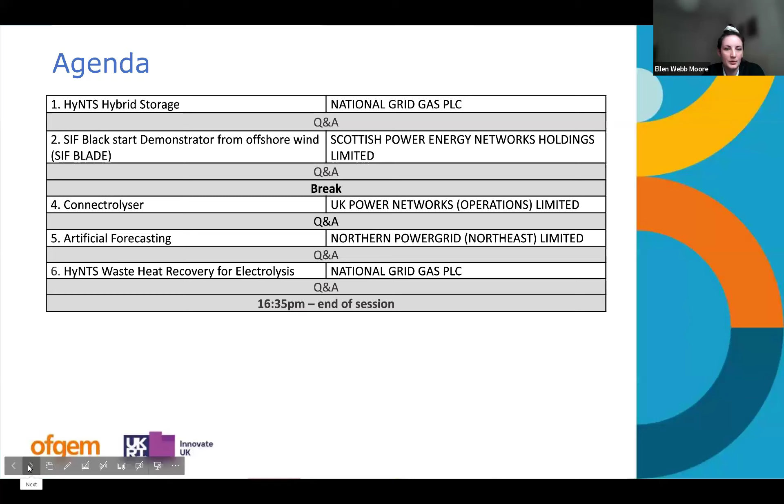So without further ado, we are ready to go with HyNTS hybrid storage.

Hi, good morning everyone, I'm Ellie. Sorry, can everyone hear me all right? Sorry, I haven't used Zoom very often. Yes, I can hear you. Perfect, yeah, just wanted to recheck before I start speaking.

Good afternoon everyone, I'm Ellie, an innovation specialist from the innovation team. Today I'll present on the SIF hybrid storage project alongside the project partner who's been working very closely within the project as well. In short, this project will investigate the use of a hybrid storage system to provide safe and efficient storage of hydrogen for our gas turbine operation.

Just to paint a picture, across the national gas transmission system there are many different types of asset and equipment present at the moment, which play a great role in the safe and reliable operation of our gas transmission network. The national transmission system currently uses compressors to manage the pressure and flow within our pipeline to make sure gas demand can be met. The majority of compressors on the NTS are driven by gas turbines, fueled by our existing natural gas within the NTS or pipeline.

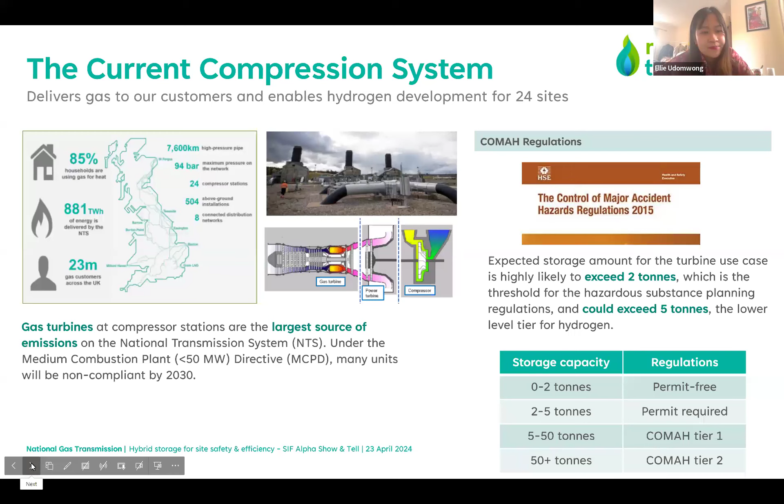Just to build a bit more of the picture on why we need to use hydrogen and why storage is the vital element: most of the gas turbines in our network can be repurposed to hydrogen. There is a project, part of SIF Beta Round 2, currently conducting the demonstration of our existing gas compressor, proving that our compression system can be repurposed for hydrogen - this is the future grid compression project.

Also the gas turbines are not running constantly. It depends on the fluctuation of the demand for gas and other elements within the operation. As a result, we need hydrogen storage facilities in order to provide flexibility and make sure that our supply of hydrogen is able to tackle the instant demand for gas.

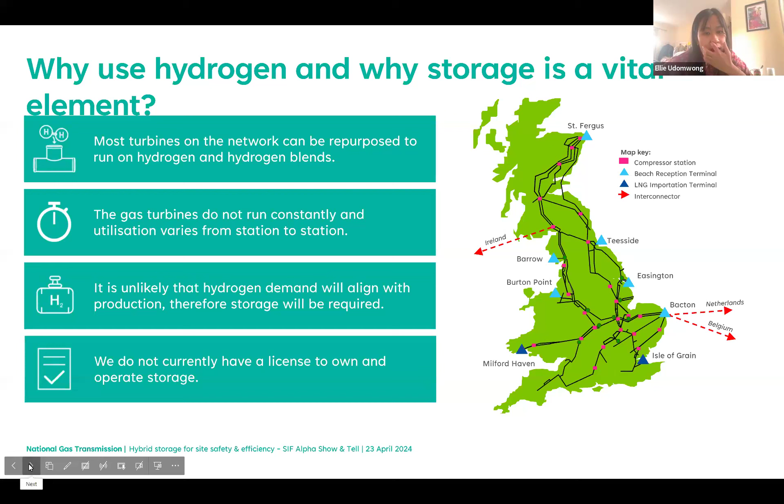Next slide, please. So storage and release of hydrogen within the relevant timescale is going to be vital in order to ensure there is a consistent energy source and improve resilience of the network. That is why we are having a look at the study of this system.

For example, compressed gas storage is already a method being utilized widely today within green hydrogen production. However, for our operation, the site requirement and safety of the system is going to be limited, and we need to look for alternative technologies such as solid-state hydrogen storage to provide the benefit of solid storage density and also safety.

But within the discovery phase of the project, we proved that solid-state storage couldn't supply hydrogen for our operation alone, due to quite a low release rate of the system - it can't tackle the requirement and the demand.

As a result, this project would like to look at whether hybridizing the solid-state hydrogen storage system alongside a gaseous hydrogen storage system could provide safe and efficient storage of hydrogen for gas turbines.

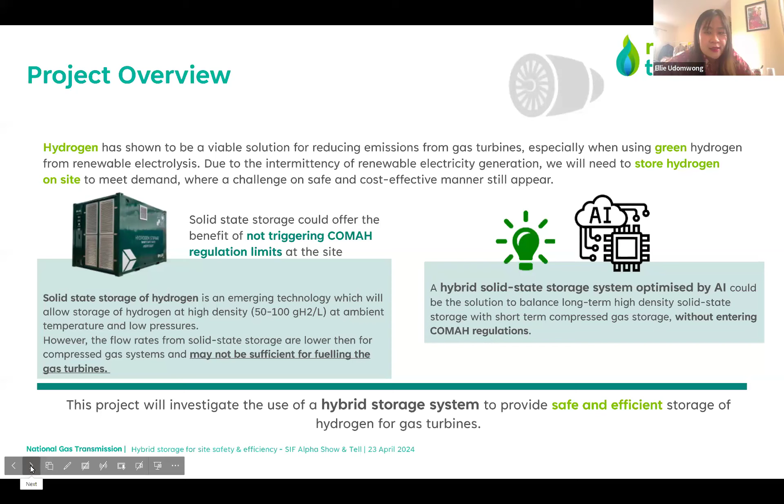Just a bit of a quick explanation on solid-state storage: because hydrogen reacts directly with the storage material itself, the solid-state hydrogen storage technology actually offers the benefit of potentially avoiding the COMAH regulation, just because technically the component being stored at the location is not hydrogen.

Just to introduce the project plan that we have conducted in the alpha phase and also the project partners: we have been working alongside MTC, H2GO Power, as well as HydroGenus and UKPN.

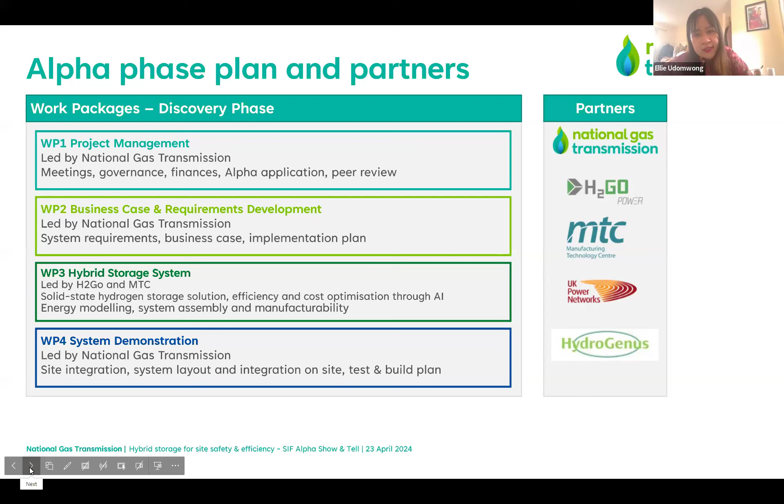I've been working very closely looking at the energy modeling of this system, the techno-economic analysis by utilizing AI of the system, as well as conducting the system demonstration design and defining what direction is going to look like after the alpha phase of the study. Next slide, please.

Within the alpha phase of the study, we have had a look at one of the compressor station locations, and we understand that the peak fuel consumption of the site is going to be 45 megawatt capacity. More importantly, we also found that there is a selection of system configurations in order to use hybrid storage within our operation.

We also have proof that different storage materials from H2GO Power technology could actually support different deployments of the hybrid storage system and also meet the requirement of the gas turbine. More importantly, the energy model has shown that if we blend 25% hydrogen into our gas turbine, we are less likely to need any additional hydrogen supply from either through-the-fence or an alternative hydrogen producer.

However, if we actually blend 100% hydrogen into the gas turbine, it's more likely that we will need additional capacity or additional hydrogen supply from somewhere else. More importantly, within the location we studied, we have highlighted that the associated equipment of the system is going to fit within the space available at the location. We are also looking at the hazardous area zone, and the findings have shown that the system can be kept away from the site boundary and wouldn't majorly affect the hazard within the location.

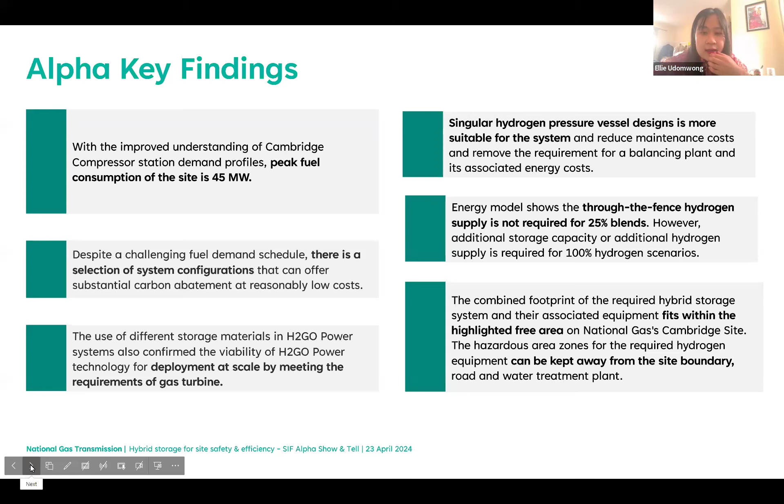Hello all. Working on the alpha project, the alpha phase, the MTC had deliverables that spanned a range of project work packages. The first of these being benchmarking review.

For this deliverable, we researched global hydrogen projects that had hydrogen production and storage elements to them. We made comparisons based on a set of criteria, such as the technology readiness level, commercial readiness level, levelized cost

of hydrogen, time to market release, and hydrogen output. We concluded that the proposed SIF hybrid storage solution was comparable, but with the incorporation of newer technology, such as the solid state storage and the solid oxide electrolyser.

Following the benchmarking review, we moved on to the additional storage solutions deliverable, where we compared a variety of storage options that could sit alongside the solid state storage as part of the hybrid storage system.

We compared a variety of solutions such as compressed gas, liquid hydrogen, and a variety of other material-based storage solutions. We liaised with various suppliers and determined a list of categories for comparison and benchmarked the solutions against one another.

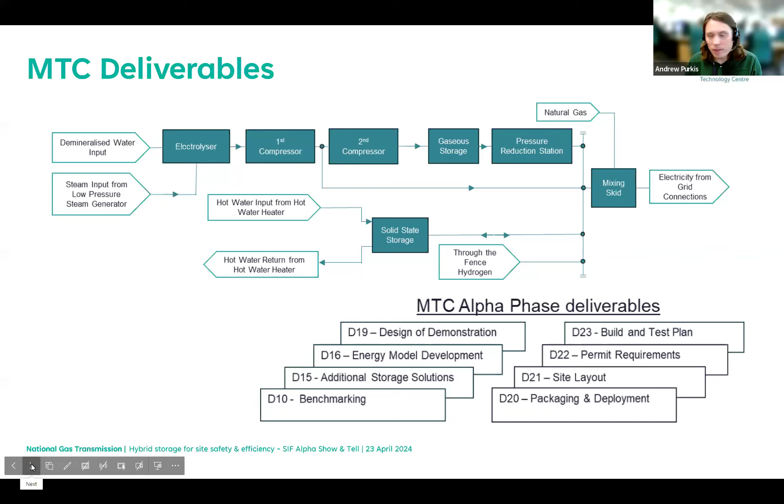An output of the system design deliverable was a high-level piping and instrumentation diagram that incorporates the main system elements. This P&ID diagram does not represent a final detailed design, but is to be used to inform the process engineer at beta phase of the concepts developed during alpha phase.

The top row shows the electrolyser producing hydrogen, then compression to ensure the hydrogen is at the required pressure for supply to the turbine fueling system.

Then a second stage of compression and a gaseous storage element to the system that complements the solid state storage to achieve the required flow rate.

Followed by a pressure reduction station to bring this pressure of the outputted hydrogen from the gaseous storage back down to that required by the turbine fueling system.

and natural gas blend. The hydrogen produced by the electrolyser can flow in and out of the gaseous storage and the solid state storage, and can also flow directly to the mixing skid.

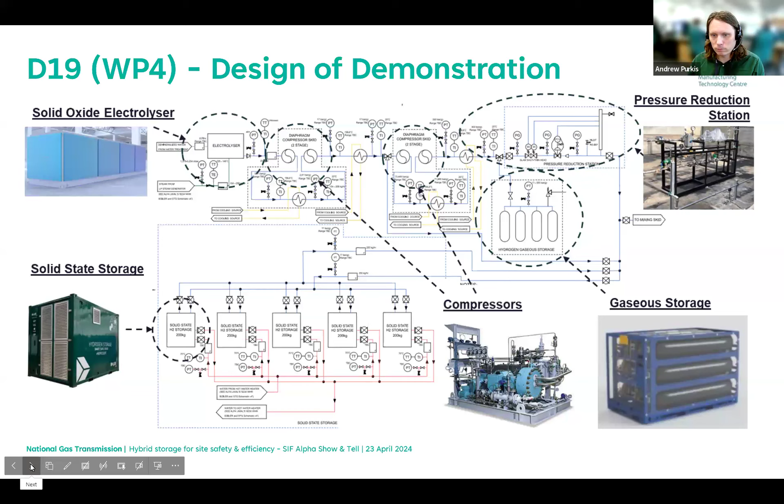Great, thanks very much, Ellie. Yes, next slide, please. Yes, so H2Go, so we basically cover 2 sort of development streams as part of this proposed SIF proposal.

So we do solid state storage, which kind of Ellie's described, as well as AI optimization of the sort of entire value chain, hydrogen value chain. And in this case, we've applied it specifically to the turbine and gas compressor use case.

In terms of the solid state storage, yes, like Ellie said, it's we store it in materials. We pack this inside a shipping container, then you have this plug and play shipping container. So it's gaseous hydrogen in, store it for a period of time, heat it up, and then the hydrogen comes out. It's low pressure, it's the same density of cryogenic liquid, but all at room storage at room temperature.

The hydrogen optimization platform that we use, it's using data from the site, which we then can do better informed decision making. It means that we can optimize the size of different assets at the site for the use case, but also in terms of real-time control in terms of when to turn things on and off.

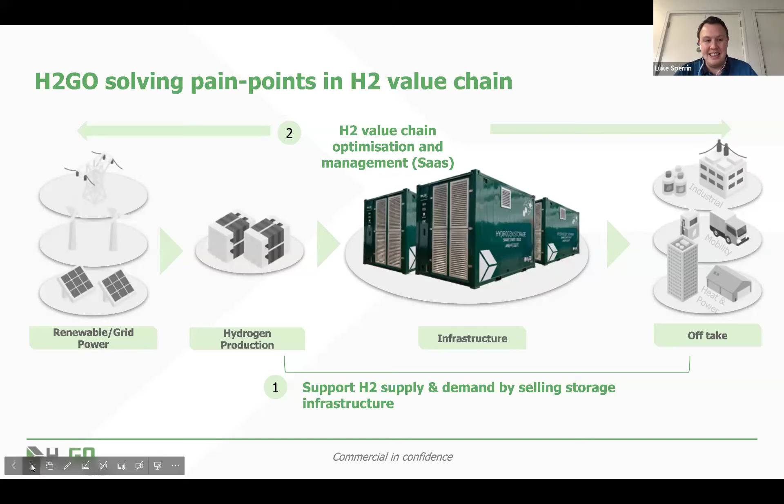As Luke just alluded to, what we're doing on the optimization side is building on the great work the team at MTC did to look at how we optimize the infrastructure sizing of the system when we scale this up to multiple sites in the NTS, in the beta stage and beyond.

The objectives we're looking to optimize are to maximize the total amount of carbon abatement while also minimizing the levelized cost of hydrogen. You can think of these two as a trade-off: given that we have to decarbonize, how can we do this as cost effectively as possible so that minimal costs are passed on to the end consumer? There's a variety of key infrastructure sizing decisions we have to make.

One key thing is the balance between compressed gas storage, which is limited in capacity due to the COMAH regulations, and additional solid state storage. We perform this optimization using an iterative procedure that uses AI to learn from previous simulations and thereby efficiently identify the optimal configuration of the system.

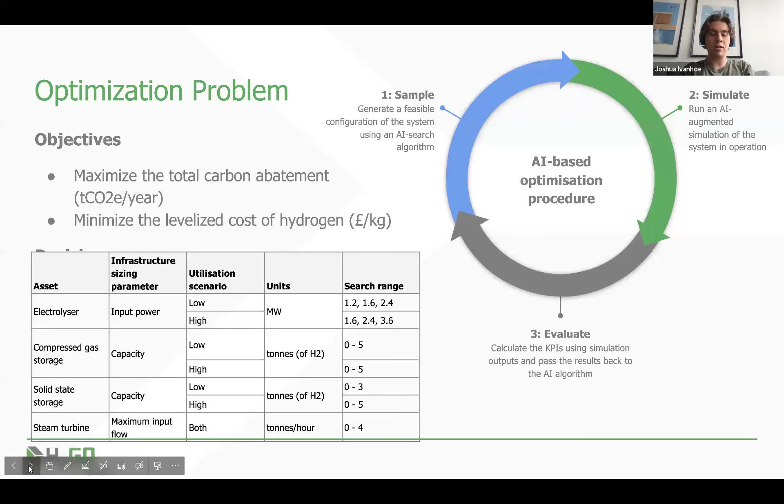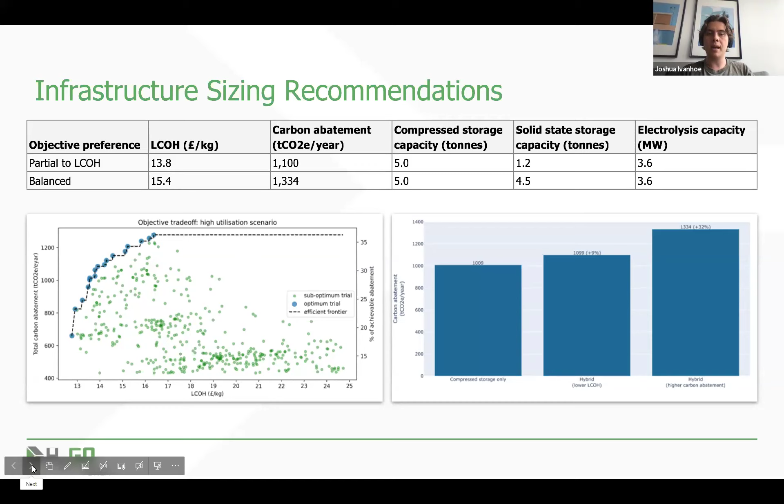The plot on the right shows how in either of these configurations, the solid-state storage enables us to achieve a boost in carbon abatement of somewhere between 9 and 32%, depending on our preference for cost effectiveness.

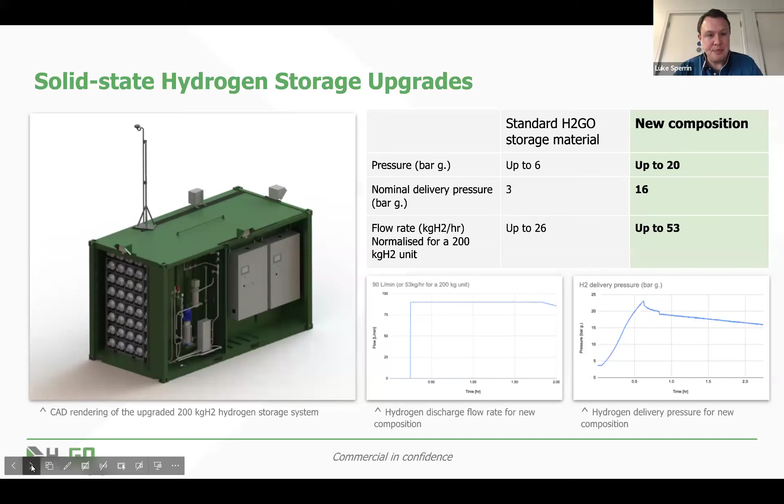So this is just summarizing some of the outputs. We managed to double the flow rate, increase the output pressure by 5x, which meant that it was viable in this use case of the hydrogen turbine use case.

I think we've successfully shown that we can use solid state storage to mitigate against COMAH regulations, which are costly, but also enhances safety at the site and surrounding the site. So you're already storing hydrogen until you need it, for instance.

The use of AI managed to find a more optimal configuration, which meant better use of proceeds and funds to build these sites. But it's also designed for live operation, so as part of the next beta stage, we would be looking at the control of the system as well.

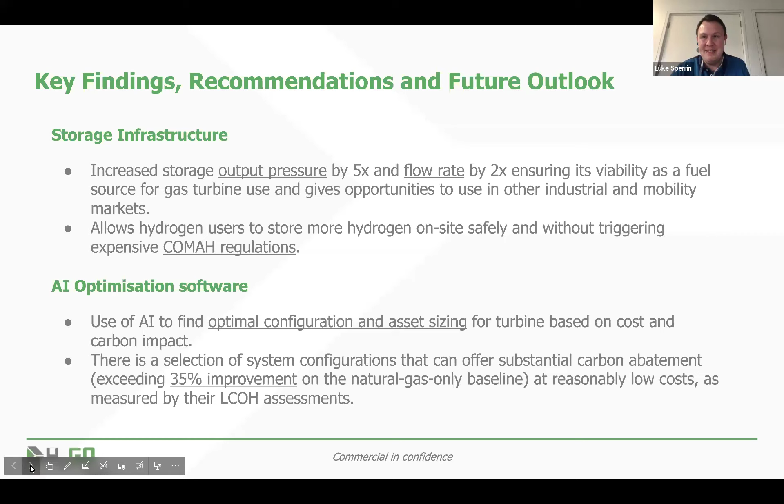So the next element is on the benefit of the hybrid storage system. From the financial perspective, by using this system, the operating of the network could be optimized and also reduce utilizing locally produced renewable energy source, because we are going to be producing green hydrogen on site.

Additionally, there could be a financial incentive to reduce our emissions within operation of the network, which we are planning to implement in the 2030s onward. Regarding the cost saving from our operation, that will obviously reflect in cost savings for the consumers' energy bill, as well as users of the network service.

Regarding carbon saving, that is going to be the direct carbon saving per year against our current business as usual operation, regarding using hydrogen and using hybrid storage to increase flexibility of the system. That is also going to improve the efficiency of the storage mechanism, which will consequently reduce the overall impact on the energy system.

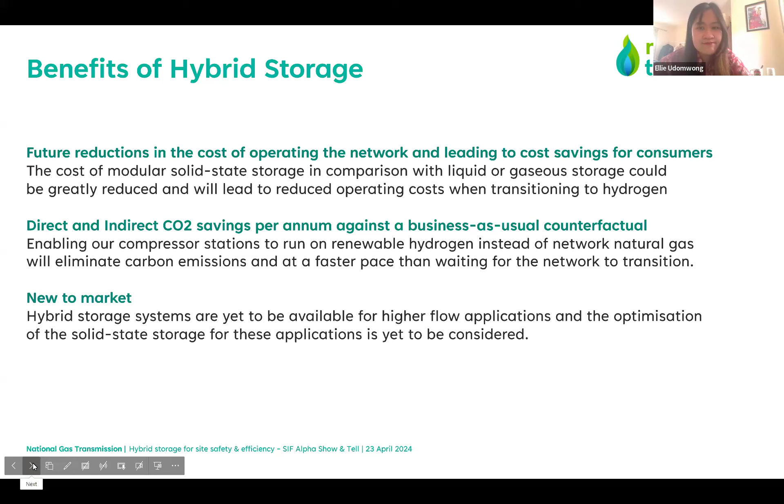So what's going to happen next after the alpha phase of the study? Under the next phase of the study, we are planning to finalize the full system design and cost, and also decide the integration of the system for our selected testing site for the next phase.

We are planning to conduct the demonstration of the hybrid storage system for our NGT operation, and also for the wider application as I mentioned previously. So we are seeing the demonstration of this system not only to bring benefit into our operation.

We would like to explore is there any chance that we could bring together the industrial or transport user, and then also use this testing site to prove the applicability of the hybrid storage system.

And as a result, we would like to engage with either hydrogen users or suppliers and explore what wider collaboration opportunity we can have together.

And obviously after the demonstration process, we are planning to roll out the system. So we would like to see how the system is going to look if we actually roll out this solution across the NTS network or across the asset in the UK. So we will continue to understand our business case and see how it will look if we have a full rollout to the network.

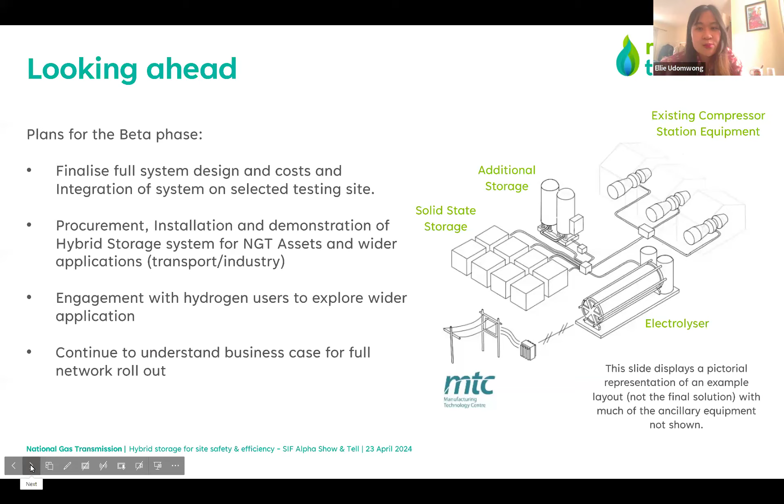I think that is pretty much everything I would like to cover today from the hybrid storage perspective. Thank you so much for listening, and I hope you find it useful. Happy to answer any questions you may have.

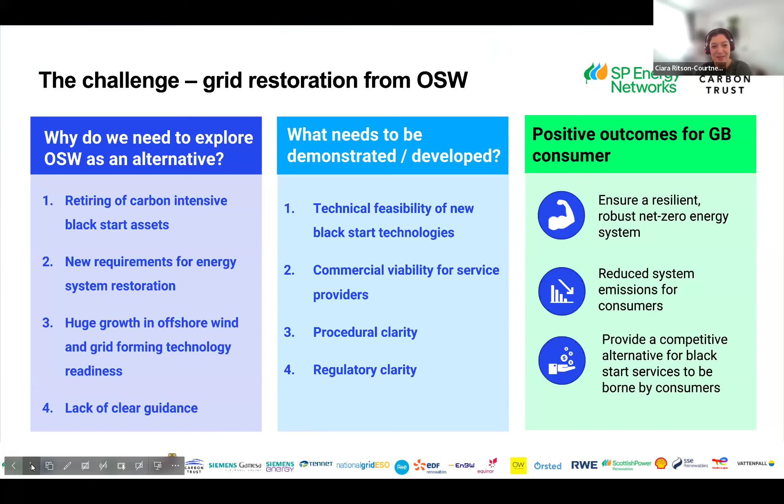Do you mind going to the next slide, please? In SIF BLADE, we have a very large consortium. I introduced a couple of my colleagues there, but as you can see, it's quite broad. The consortium consists of onshore networks, offshore network designers, transmission system operators, offshore wind developers, research institutions, and technology suppliers. The breadth of this consortium has been essential for understanding and defining offshore wind's capability and offering to the GB network. A key part of this project is bringing everyone together to solve the problem as a very large group.

Next slide, please. So what have we looked at in our alpha phase activities? Work package 1 has looked at the technical assessment of onshore system restoration from offshore wind. Work package 2 looked at both the business case assessment and undertook an offshore and OFTO regime review. Work package 3 looked at the technical assessment of onshore system restoration from a coordinated offshore network. Work package 4 has scoped a beta phase, looking at what work still needs to be done to ensure this technology can get to business as usual. And work package 5 has just consisted of general project management.

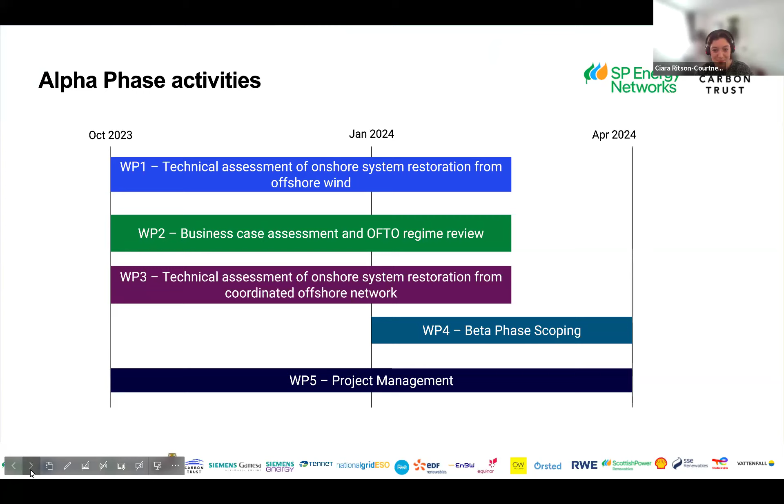So we will talk about some of our work package 1's findings now. If you don't mind moving to the next slide.

Augusti? Good afternoon, everyone. My name is Agusti. What I would like to discuss with you is a little bit about the results of this technical work package 1. Some of you might argue that if you look at the network and the wind farms, we already have a network and wind farms available, and we have done black start and have restoration plans already in place.

But what we have to understand is that the way black start is done from offshore wind is substantially different. One, from the network point of view, because we are looking at different restoration paths and different routes that electricity should go, and these are not designed for restoration. The other thing is that wind farms are not designed for this either. So what we believe is that with some enhancements, this might be possible - this is why we are applying for SIF, because we believe that with a little effort, we can deliver a lot for consumers.

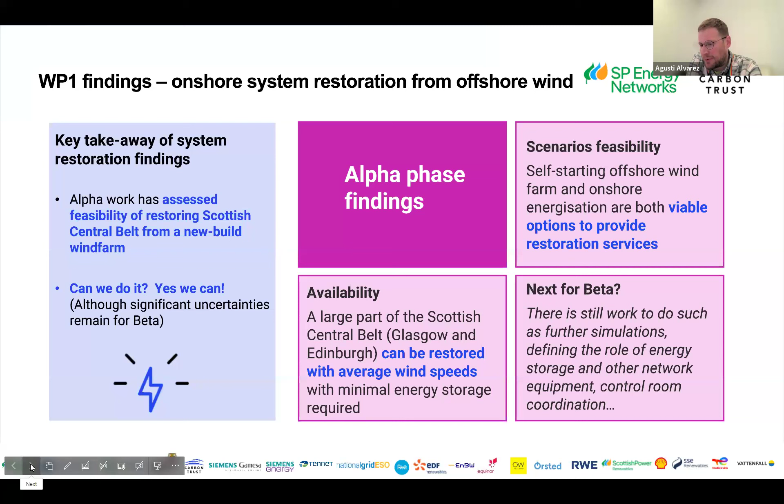This is a nice context for beta. We still have further work to de-risk, to understand better the technology we should order, and understand better if the restoration paths we've chosen are good enough. But so far, from the alpha point of view, it seems that we can do it.

So the OFTO regime review looked at the current regulatory environment and OFTO regime in relation to offshore wind providing these black start services. In this work, no significant regulatory gaps were identified. However, new regulations are being introduced around the time of the beta phase, and therefore we plan on monitoring this in the next phase of the project.

No prohibitive roadblocks in the OFTO regime are expected to undermine offshore wind market participation, but we do plan on monitoring this in a future phase. The work undertaken did identify that market requirements need to be defined or updated, which is part of the work we propose for the next phase, making sure we're accounting for availability, etc. Overall, the outcomes of this work package were quite positive and no major roadblocks have been identified.

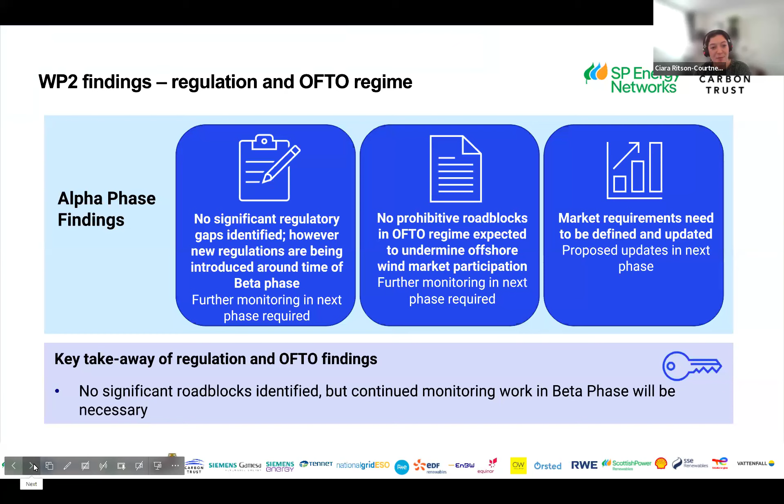However, this is only part of this work package. The second part is the cost benefits assessment, which Gordon will be presenting in the next slide.

Good afternoon everyone. As Ciara says, we've been modelling the GB-wide cost benefit case for the concept. In contrast to the work Augusti presented, which was very technically detailed focusing on a specific part of the network, we've been looking a bit more higher level, trying to extrapolate across the entire system. I won't go through all the ins and outs of exactly how we've done that modelling, but I'll talk through the key takeaways.

The main thing is that under some of the future energy scenarios we've looked at, the ability to have offshore wind contributing to system restoration is essentially required. Without that capability, some of the scenarios won't be able to achieve the restoration targets and standard that exists. That's a phenomenon we see in the late 2030s into the 2040s, particularly when there's lots of renewable technology and very significant changes to the composition of the energy system.

Of course, the capabilities we're talking about and requiring don't currently exist, which is what we're finding elsewhere in the project. So our conclusion is that we either need to develop that capability in the BLADE project, at quite a large scale, because in some of these scenarios we're testing we end up using a lot of offshore wind to provide this capability. The counterfactual is essentially to have dedicated restoration generators, which, to be consistent with net zero, would have to be some kind of low carbon thermal generation technologies which don't currently exist. It would be expensive anyway, but particularly expensive if they're just sitting there to provide system restoration.

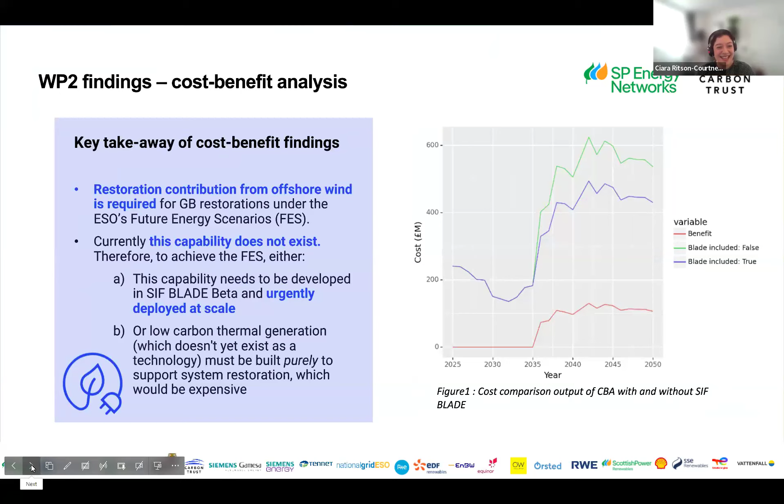No, across to Augusti again. Back to Augusti, sorry. Yeah. So, now we are going back at the technical part.

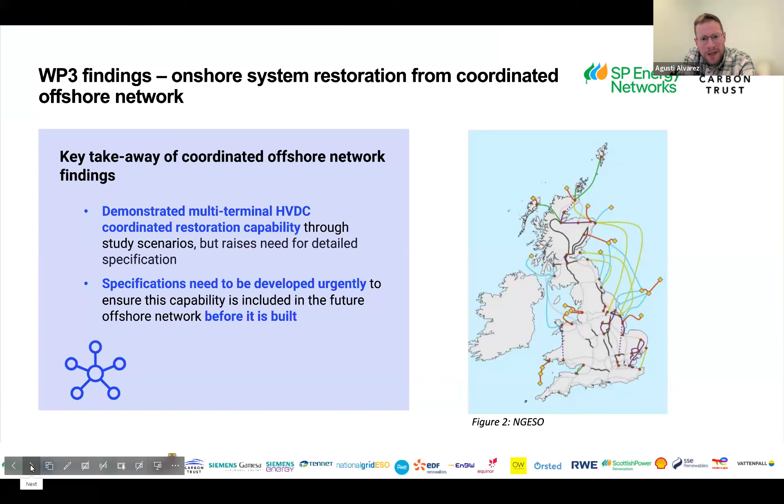One of the things we have done is look at the future. This is how the future is going to look according to National Grid. All these green squares are offshore wind farms, some of which are going to be using a different technology called HVDC, using DC instead of AC. In Work Package 3 we looked at the feasibility to unlock these wind farms, which are going to be installed in the mid to long term, in order to provide restoration services. As we are doing BLADE and have these wind farms planned, one of the things we have to do is start writing the specifications, considering that these wind farms might be able to provide this capability. This is one of the findings from this work package: we can enable even further offshore wind farms to provide restoration. And that's it. Next slide.

However, significant uncertainties around technical requirements, TRL of some of the technologies, market requirements, and commercial arrangements, as were pointed out on the previous few slides, do exist, and we need to address those. Fundamentally, I think Augusti alluded to this as well, but we really need to change the mindset of restoration into more of an integrated whole system approach to achieve net zero compatible restoration, rather than relying on one, two, or a small number of large thermal generators.

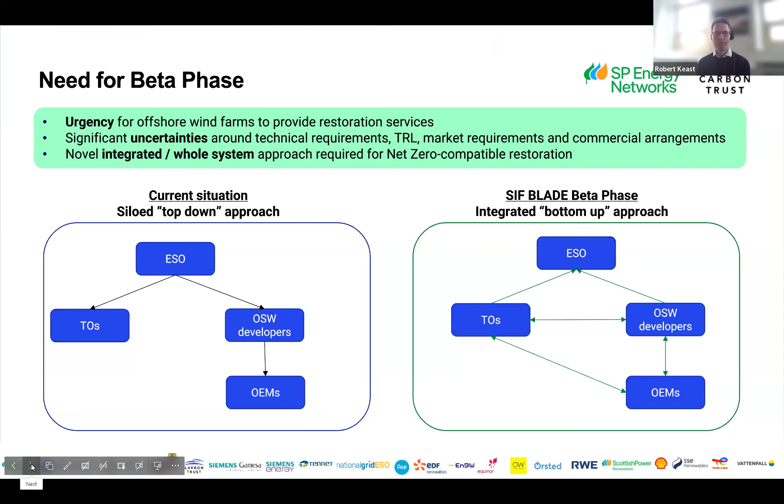And as Kira mentioned in the first slide, having this large consortium is essential to achieving that. What we'll be doing by the end of the project is feeding that evidence up towards the ESO, such that they can understand what the industry is capable of from a technical perspective, and hence set suitable market requirements to incentivize future generators to install this technology. Next slide, please.

This is an overview of the approach for the beta phase. I'll actually start this slide at the bottom.

Augusti mentioned looking at the Scottish Central Belt and the future offshore network location. You can see those pointed out at wind farm 1 and 3. We're also going to look at another wind farm around the Peterhead area. So we're looking at 3 separate locations, 2 actual locations and 1 future location, and these have all been selected because of their different restoration requirements.

Around the Branxton area, there's a lack of restoration from any source. Around Peterhead, there is some hydro possible, and wind would have a different role in that restoration scenario. And then wind farm 3 is looking at the offshore coordinated network and the DC coordinated network.

Again, different restoration requirements on those wind farms. So we think if we can cover these 3 areas, we'll be looking at quite representative scenarios that can be rolled out to all locations, GB and also internationally. So how are we going to study these locations?

If we move back to the top, looking at work package 1, we'll be doing site-specific detailed feasibility studies, basically assessing various wind farm options, technology options, and selecting the optimal ones. So we'll be looking at the various restoration methodologies and the grid requirements for those restoration methodologies.

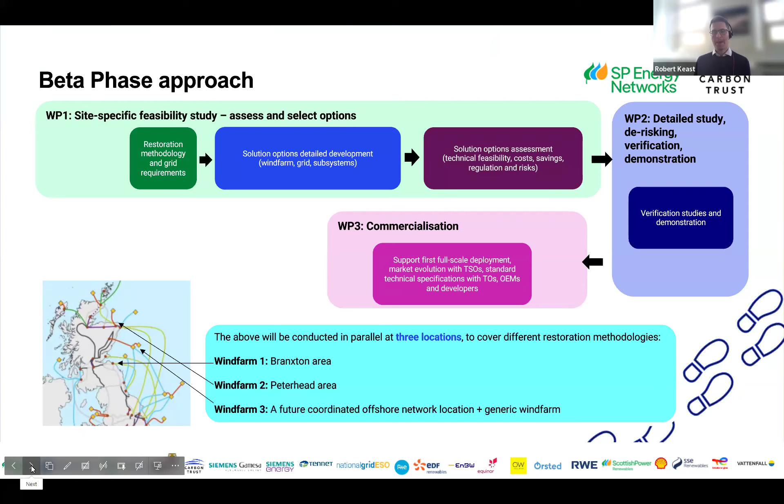That was it - that was the overview of the beta phase. And we're ready to take any questions.

Great, thanks for that presentation. There's just one question in the chat, but I think it was sort of addressed in the last portion of your presentation, just around ESO involvement, particularly for a future phase, and what their involvement might look like. Did you want to expand on that more?

Yeah, we're happy to. Thanks, Ellie. Good question - they are involved in the project, in a project advisory role. We did invite them to partner, but because they run the market as it currently exists, they feel it's sensitive, I guess, to be partnering in some of these projects. But they're very supportive of the project and they're keen to learn.

So we have National Grid ESO from GB involved, but we also have TenneT from the Netherlands and RTE from France. The idea is we're really keen in this project to be an internationally leading project, but it's also important for the sake of the OEMs and developers who are going to be developing these solutions, that they are meeting the same requirements across borders - because otherwise, if there are different requirements in different countries, then the cost for every individual country is going to rapidly increase.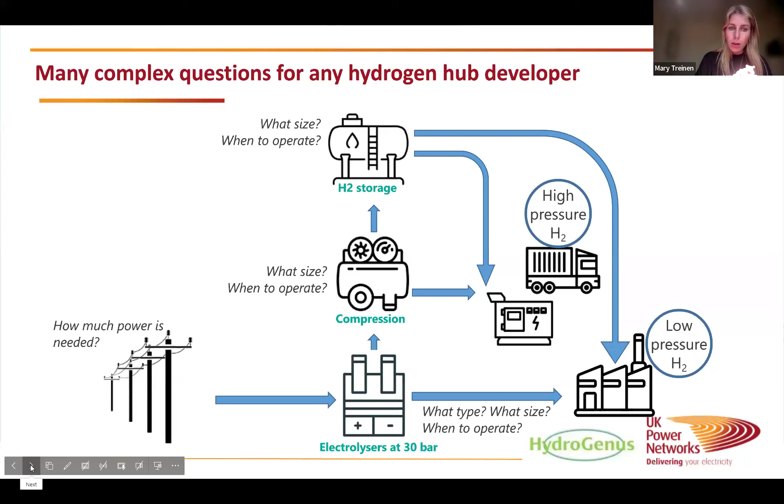So connecting with a DNO. Traditionally, people would come to us and say, I have an electricity requirement, this is how much I need, and we would come back to them with a quote of how much that's likely to cost and how long it's going to take us.

If you look at the current landscape, there are so many industries that are electrifying. It only takes to consider the car industry, and you realize how much more electricity is being asked of by DNOs. Because of this, the wait time to get connected is getting longer and longer as we try to cater to so many different industries that we hadn't otherwise worked with. So that's going to be a problem for this growing market of green hydrogen, of all of these electrolyzers that are trying to connect to our network and start producing hydrogen in a green way, something that is technically helping us achieve net zero.

So to do this, what we offer is different types of connections, like flexible connections, curtailable connections, and various other things. That means we can't guarantee that you're going to be receiving power 100% of the time. We might send a signal to your system and say, tomorrow we're going to need to turn you off, or we can send you electricity overnight when maybe people aren't using it as much. It's about negotiating that with the person that's asked for the connection. This also stops us having to reinforce the network more and more, because we're not needing electricity at peak times because of your connection type.

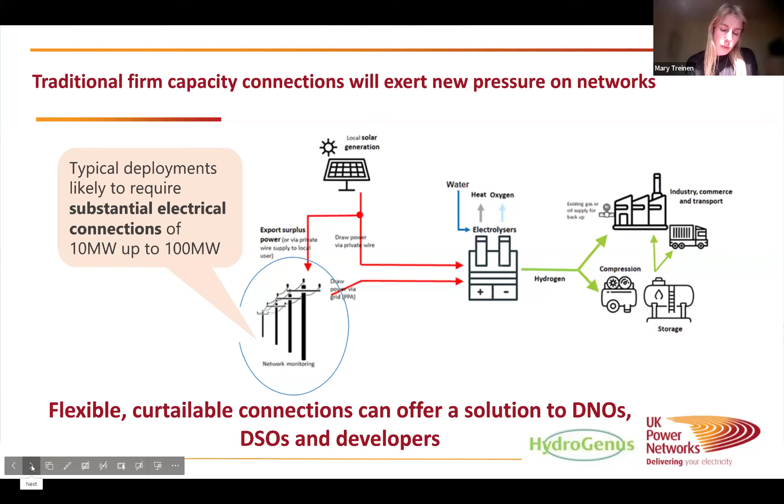So this is where our whole project has been focusing. The Connectrolyser, as we've called it, is an optimization logic and tool that is that piece of the puzzle that allows you to connect and operate hydrogen production facilities flexibly.

What we've been developing over the last 6 months is a tool, the requirements for a tool, and a testing version of that tool that allows us to optimize the entire hydrogen production facility - optimizing hydrogen production, compression, storage, some predictive capabilities around weather, and when you need to meet your end user needs. But the primary rule for that optimization is the electricity requirement from the DNO.

Under a flexible connection, if you agree to connect via flexible connection with UKPN, you accept that you might be curtailed, so you might be turned down, you might not have access to all of your electricity capacity all the time, but you can connect sooner and for a lower cost because there isn't that reinforcement requirement from the distribution network.

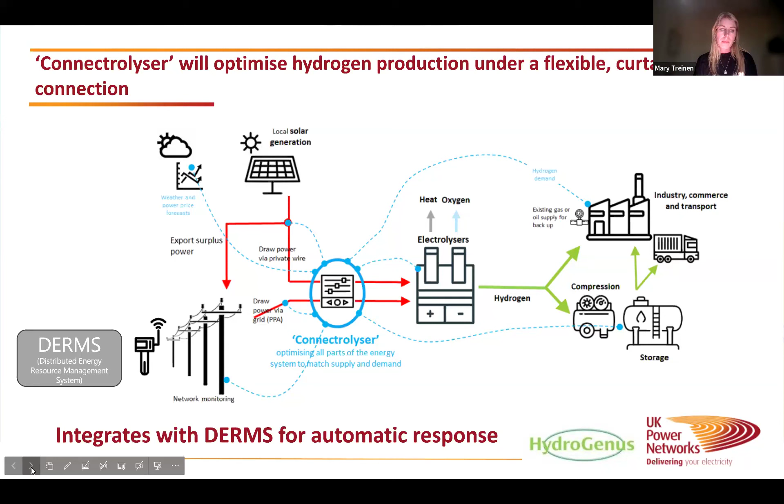So to do that, there have been several different things we needed to explore in terms of potential limitations and enablers as we have gone on. We started out saying that we know there are existing flexible connection products that exist within the DNO. Let's make sure that the limitations of a hydrogen production facility fit within the requirements of those connection products, or might they need to justify a new type of connection based on some of the factors I talked about earlier.

So we evaluated the different connection products and evaluated the D code, which is the distribution code that all DNO licensees are subject to, to make sure there would not be any changes required to that code in order to connect and operate these hydrogen production facilities flexibly. Luckily, they were compliant with existing standards. We did identify some opportunities for improving processes, or learning about how different connection arrangements might evolve over time, or how different flexibility products might evolve over time when you consider how a hydrogen production facility might be a flexibility asset.

We also looked at some of the technical and commercial constraints - barriers and enablers - that could allow these hydrogen production facilities to operate flexibly. As I said earlier, several electrolyzer types can respond in real time, so there's an opportunity for extreme flexibility there, and they can quite safely meet the ramping requirements set out within a flexible connection arrangement, which is that it needs to be a real-time response. If you can imagine there's a fault on the network, you need to be able to respond in real time to protect the network. We then looked at what the system requirements would be for our hydrogen production facility.

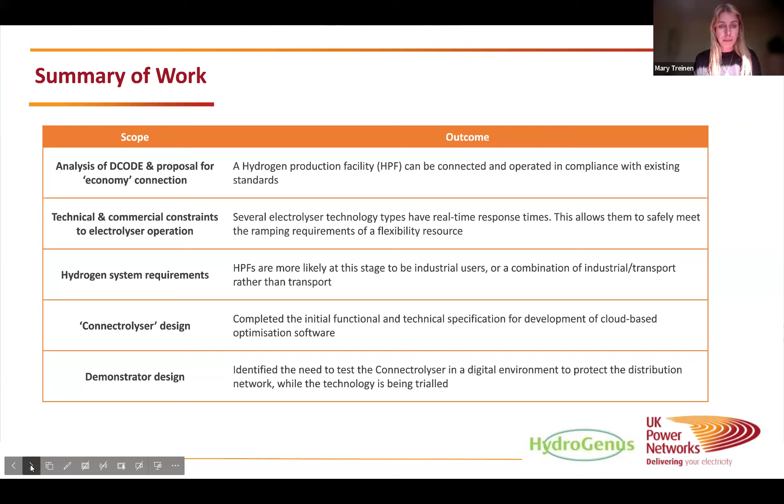Yes, so the early cost-benefit analysis we've carried out as part of this project, as I mentioned before, the aim is to reduce the need for reinforcement of the network, and also help hydrogen hubs connect earlier because they're not part of that queue we explained.

Our initial model has estimated that a hydrogen hub could connect to the grid 3 years earlier, meaning 3 years of producing hydrogen when maybe they otherwise couldn't have, making money 3 years earlier. We believe that's a strong benefit for hydrogen hub developers.

In terms of network reinforcement, across all of the United Kingdom, we estimate about 3.4 billion would not have to be spent on allowing all of these hydrogen hubs to connect. So that's another key benefit for the network and customers of all DNOs.

And with this, avoided curtailment becomes the carbon reduction. We're not spending money installing lines, digging up ground to lay cables. We're also displacing fossil fuel use because of the potential benefits that hydrogen can have as we start to use it more.

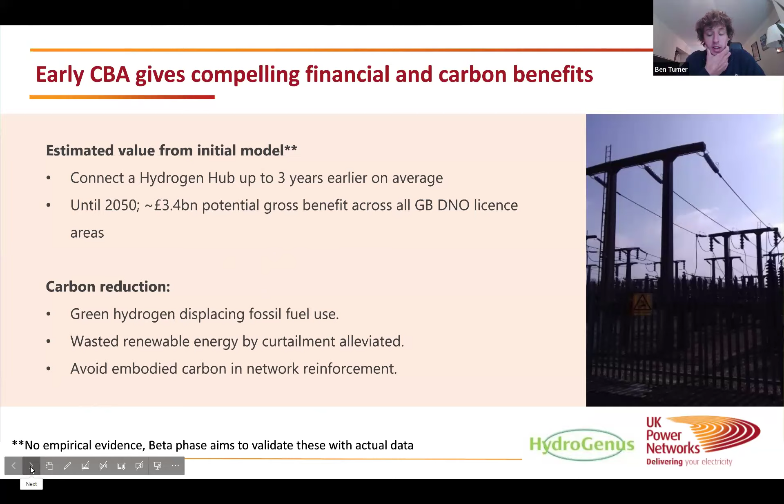That leads me to the plans for the future. We plan to develop the optimizer, the Connectrolyser, as it were - the smart control system. We then plan to build a digital hydrogen ecosystem, essentially simulating how a hydrogen hub would operate, and test the smart controls within this ecosystem to iterate it and make sure it works how we want.

Whilst we're doing this, we would test different types of flexibility services - what type of connection works with a hydrogen environment and how it will respond. We'll use this to develop a playbook that will allow other hydrogen hub developers to see the work we've done, connect to the grid more easily, and serve as an information piece for other DNOs, so if hydrogen hubs come to them, they can refer to this for how to connect to the grid and facilitate this influx of green hydrogen.

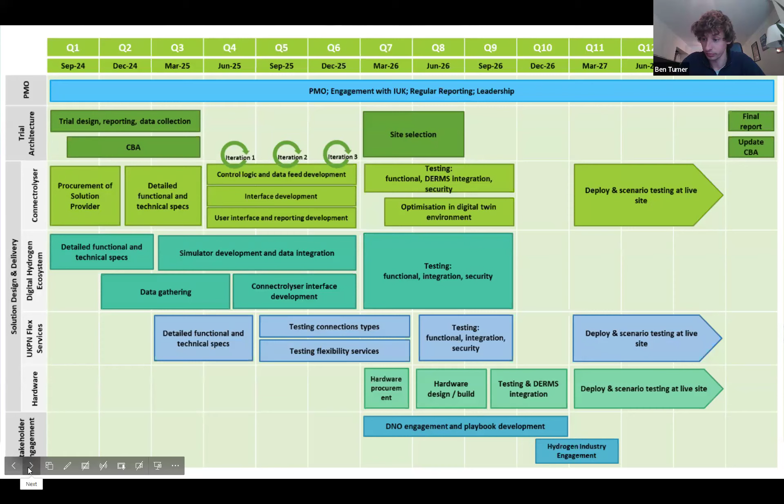Next slide, please. Just our final slide really - we believe there's a lot of benefit for this. It can make the DNO's job easier, and it can really allow hydrogen hub developers to connect to the grid faster. We also believe it might help them run their plants more efficiently.

We believe that the DSOs can develop really innovative flexibility offerings, and overall society can benefit from a really exciting industry that is in its early days but is showing really significant growth. Thank you.

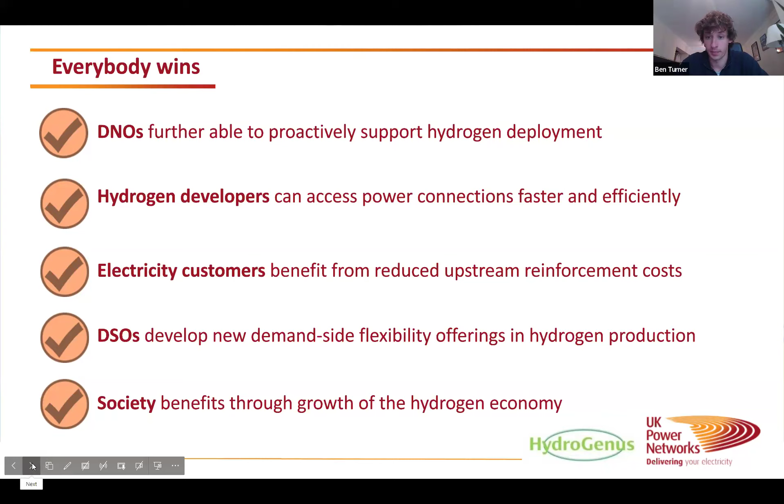Great, thanks for that, that was a really thorough presentation. We do have a couple of questions here. One was: what sort of alignment is this project looking at in terms of the hydrogen economy work that DESNZ are doing, and how are you fitting what they're doing in line with this project around flexible versus stable connections? Are they at odds with one another, or?

I can answer that one. Sorry, I've got a bit of sun in my face there. I would say that they're absolutely in line with each other. In parallel to this project, there's what's called the hydrogen allocation round, which is an incentive mechanism for low carbon hydrogen sites to be developed, and we are closely involved with that. This challenge and opportunity around having the volumes of electricity required to operate hydrogen production facilities will be something that any hydrogen developer is facing, and the costs are high.

So this is extremely beneficial to the industry and is in line with innovation in the hydrogen space, because there's an opportunity for cost saving when going into these incentive rounds happening in parallel to this innovation work. So I'd say they're largely aligned, and any learnings from this are interesting to the hydrogen industry more generally, because they're always going to need to interact with the DNO. So there's learnings from not only interacting, but also from the potential commercial benefits of connecting sooner and at lower cost.

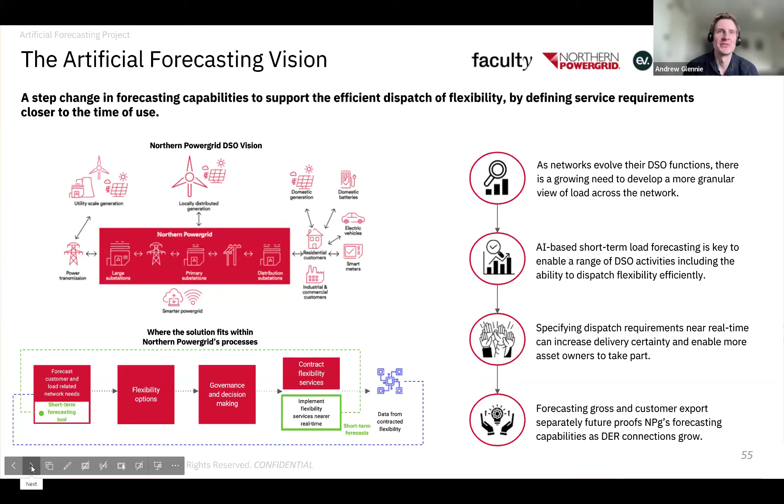Thanks, Neil. So let's move on to the next slide. Yes, so my name is Andrew Glennie. I've been overseeing faculty's contributions to the artificial forecasting project. And as Neil mentioned, we come in as technical AI experts working with NPg, Oaktree and EV.Energy.

So what we've done at Alpha over the last six months or so is develop operational forecasts across NPg's network of primary and secondary substations, looking at a horizon of day, week and month ahead. And that fits in with the flexibility first agenda that Neil was referring to. So the ambition here is to make better flexibility procurement decisions by using the forecast to identify windows for flexibility procurement months in advance, but critically enable the refinement of dispatch requirements from flexibility service providers closer to the time of need, improving the deliverability of these services and potentially enabling a wider set of asset owners and operators to take part with this greater certainty.

So Alpha has delivered functioning proof of concept forecasting models at all of these levels. I will now hand over to the team to take you through the specifics of what we did and what the plan going forward looks like. So I'll hand over to Rukayat from our team. And if we can move to the next slide, please.

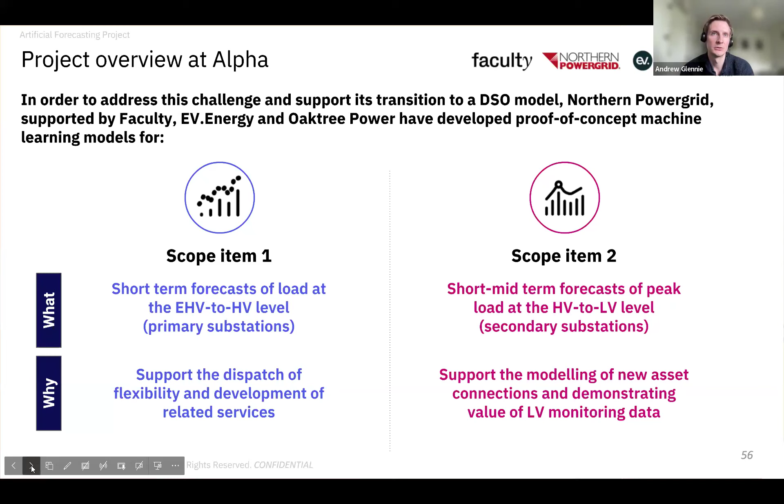Thank you, Andrew. So hi, everyone. My name is Rukayat, and as mentioned, I'm from faculty, and I worked on the commercial and the project management aspects of this project. So in terms of the overview and the work carried out at Alpha, this was split across four work packages, and for the purpose of this presentation we'll just focus on the first three. So the first work package focused on user research, with an aim to understand NPg's objectives around using flexibility and how a solution could influence their decision-making processes.

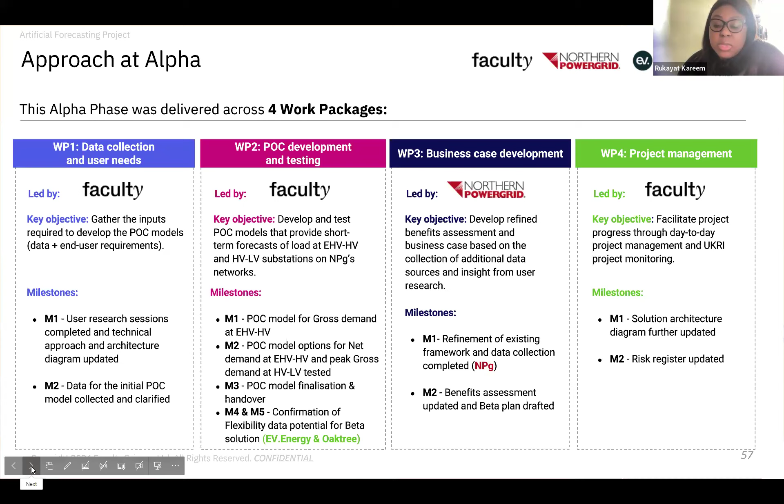The second work package focused on delivering a proof of concept forecasting solution. Here we tested different AI and machine learning approaches across the different scope items, and we also involved the flexibility partners to understand the broader application and benefits of the solution beyond DNOs. And the third work package focused on the business case of the solution, using the insights that we gained from user research, the data collected, and also the flex partner involvement to understand the potential benefits that can be gained from the project. Next slide, please.

So in terms of the results achieved on the user needs workstream, we held a number of user research sessions with NPg's forecasting and flexibility teams to confirm the business application for the solution. That is essentially that NPg will be using the short-term load forecasts to specify their flexibility dispatch requirements at much shorter timescales compared to what their current process is, and this will enable them to procure and interact with the flexibility market in a much more economic and efficient manner.

I won't go into too much detail on the results of the POC development and the benefits workstream, as these will be discussed shortly. But in terms of the results obtained across the workstream at Alpha, we feel we've demonstrated a clear case for the project to continue. So now we're looking ahead to Beta, where the ambition is to develop a solution that in the first instance can be deployed within Northern PowerGrid's environment, but also a solution that we think is applicable for other DNOs as well to utilize. And with that, I'll hand over to Katrina to go over the technical approach and present the findings for our proof of concept.

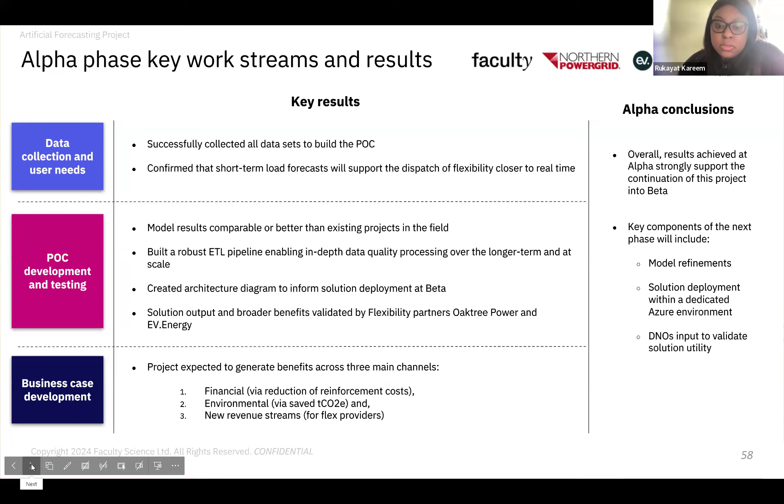Great, thank you. So yes, if we can go on to the next slide, please. My name is Katrina, I'm a senior data scientist at faculty, so I've been leading on the technical development of the solution. But before we go into what that looks like, let's just stop and look at exactly what we're trying to forecast. So as previously mentioned, we're forecasting at two levels, EHV to HV level and HV to LV level. At the EHV to HV level, we have half-hourly data on three signals: gross active demand, customer export, and net active demand. Gross active demand is the total demand for electricity at a substation.

Although it's net active that NPg really care about forecasting, a decision was made early in discovery to do that as a combination of separate forecasts for gross active and customer export. The reason is that customer export is probably the hardest of these signals to predict, as we'll see shortly. But with the move to net zero and the rise of embedded generation, that is the one that's going to become an increasing part of the signal, so if we don't get that right, the modelling will get more and more wrong over time.

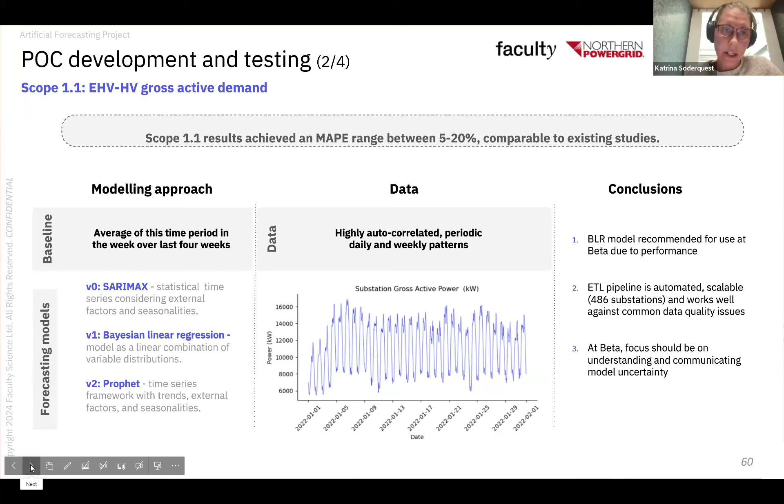Having built out decent data quality and decent forecasting capability, the focus at this work stream at Beta very much needs to be on communicating uncertainty and error in the model, so it can most usefully be used for the refinement of flexibility provision discussed earlier.

Moving to the next slide, we see a slight difference with the customer export signal. As I said, this is by far the hardest signal to forecast. There's no particular periodic pattern, and if we look across substations, we see very different behavior across different substations.

This led at Discovery to developing an approach where we considered groups of substations based on the majority fuel type feeding into that substation, whether the embedded generation is mostly solar or mostly wind, for example. If we take that group, how do we understand it as a whole, and what extra data can we use to better forecast it, beyond the calendar features and weather data people historically use? For example, does including national demand forecast help? Does including operational marginal data help?

What we found was that although grouping substations was a good approach, grouping at the fuel type level, across all NPg substations, isn't quite the right level to do things at. If you look at the behavioral patterns in the data, you see groups such as data that is very spiked or has an on-off pattern, but these cut across fuel types. So moving forward at Beta, we would group the data based on its historical pattern rather than fuel type. This also bypasses data quality issues with assigning fuel types based on the embedded capacity register, and allows a clearer understanding of what this extra data can do for forecasting, which was very mixed at Alpha because of the heterogeneity of behaviors within different fuel types.

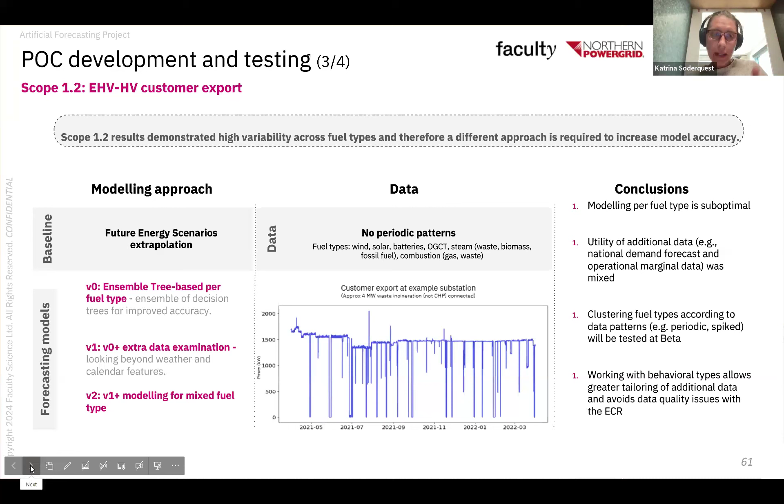So those are the technical approaches. I think I'm now handing back to Rukayat, who's going to talk a bit about the benefits.

So myself this time, let's flick over. Sorry. No worries, let's flick over.

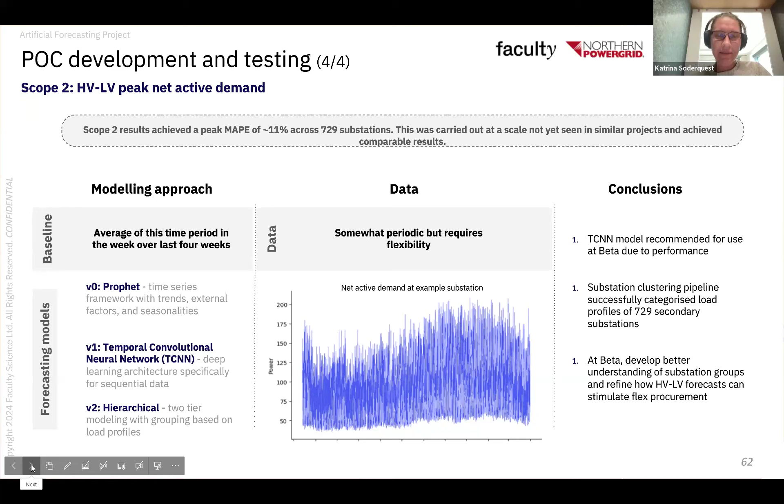This introduces the last segment really, around looking forward and beta planning and how we see the projects in the longer term. What we're really doing now is preparing for beta and all the evidence and business case required for that, and part of that is trying to assess the potential benefits the project could generate.

There are 3 main channels we've identified. One is the classical benefit related to flexibility around the potential deferring of reinforcement expenditure through the use of market-based solutions, going over and above what's set out in the ED2 plan and looking into ED3.

Secondly, around environmental benefits generated by this solution - partly by curtailing demand, but also providing opportunities for FSPs like Oaktree that optimize sites based on environmental impact, expressing savings as tons of CO2 equivalent.

And lastly, around new revenue streams, particularly for FSPs. Partly that's through improving the deliverability of existing flexibility service requirements, and also by shortening the window for the service requirement, you can improve unit prices and enable FSPs to take part in other markets as well.

So a whole range of benefits we're looking at here, and we're revising that within the beta application. We're currently estimating an NPV of around £30 million across ED2 and into ED3. But that will be refined going forward, and Katrina will take us through the lessons learned and what beta looks like, then we'll wrap up.

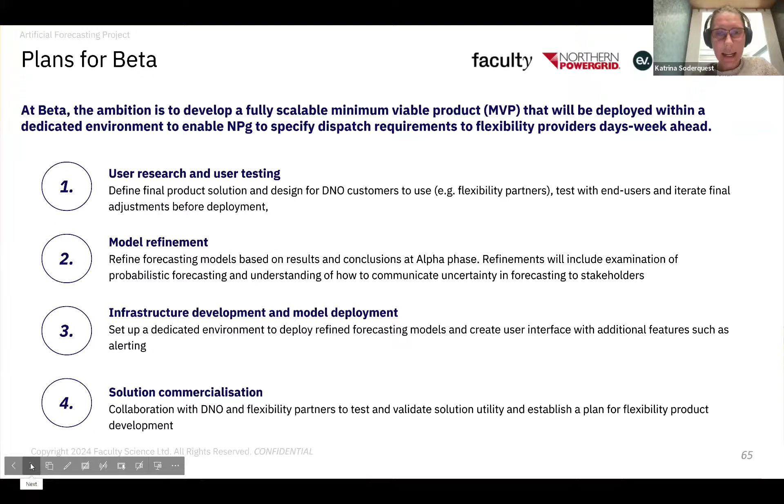And then finally, underpinning that, there needs to be work on the solution commercialization. So actually, how does this maximally benefit both NPG, but also the flexibility service providers in order to improve flexibility procurement, stimulate that market, and allow things to flourish in that space. And that's that for that slide, I believe that was the last slide. So I guess, any questions?

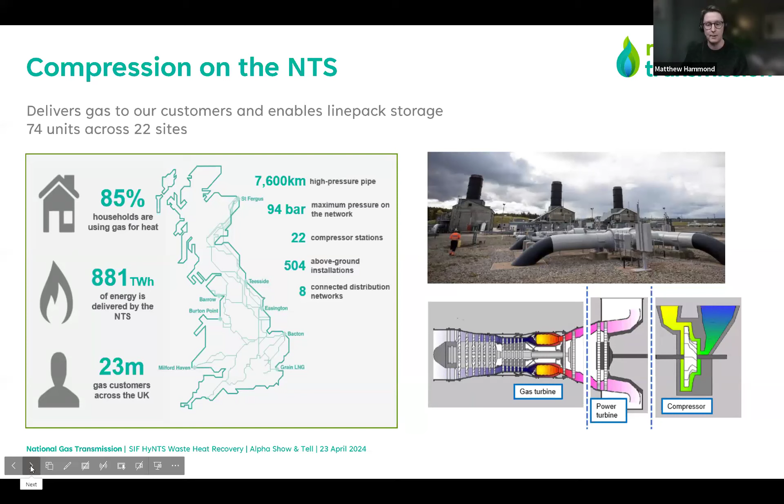So if we can flick on to the next slide, please. Thank you. So we have 22 compressor stations on the NTS. Each station has multiple compressor units. Mostly this is for kind of redundancy and resilience, so if a unit goes down, we are still able to operate our compressor system.

As I mentioned, these units are primarily gas turbine driven. We've got 74 odd units, I think about 65 of them operate small gas turbines to provide that power. The others are electric motors. So the gas turbines burn natural gas. This obviously produces carbon dioxide and also produces waste heat, which is where our project is mostly focused on.

In terms of the opportunity then, heat recovery is used across a range of industries today. Primarily, you can use the heat for multiple things. So you can use it as steam for steam networks, provide heat to other processes. You can generate electricity, and also we have been investigating whether we can use that electricity to actually produce hydrogen as well, and actually feed that as fuel into the gas turbines themselves to actually address the CO2 problem as well. If we can flick on to the next slide, please.

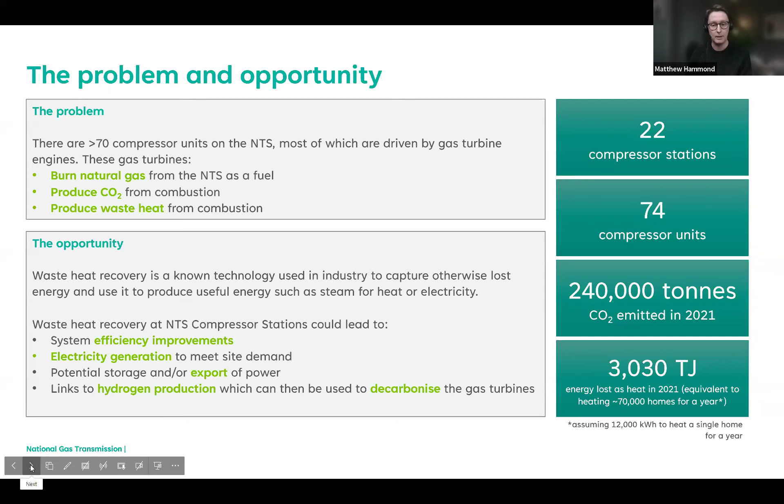There's different things we can do with that recovered energy. The alpha phase is more about the system design, what the technical capabilities are and how it will essentially interact with our existing assets and the operation of our sites and our network. Also looking at the safety case for deploying it on site as well. And beta is going to be about actually demonstrating this technology and developing the evidence that we need to say, yes, this works and this is a good idea.

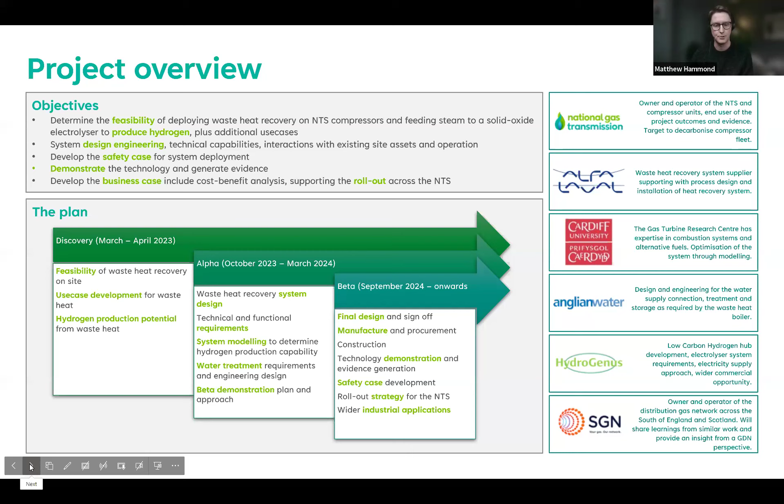SGN are a gas distribution network, so they've been supporting and feeding in use cases from the distribution side in terms of heat recovery. Can we flick on to the next slide? That should be handing over to Alfa Laval to cover some of their work in alpha.

Hello, good afternoon. My name is Richard Price from Alfa Laval. If someone can click the button, please, it should advance. So for the alpha phase of this project, the first thing was to agree on an operation philosophy.

The study site was the Cambridge compressor station. The Cambridge compressor station has 3 gas turbines, two older units, which are the Avon A20s, and a newer Siemens unit. So we have 3 gas turbines and 2 types.

It was agreed to generate high pressure steam. The high pressure steam can then be used twofold. The first is to generate some low pressure steam for supply to the electrolyzer, which reduces the power requirement of the electrolyzer for producing hydrogen. The second and bigger part was to drive a steam turbine generator to supply electric power.

So this electrical power, a new source of electric power, can be used for the electrolyzer, which is quite a heavy demand on electric power for producing hydrogen, for all the other new equipment that would go on site associated with this system, plus the existing site requirements, which is around 600 kilowatts at a peak, and possible export to grid. With the waste heat, we may generate some surplus power, which can be exported to the grid for reuse.

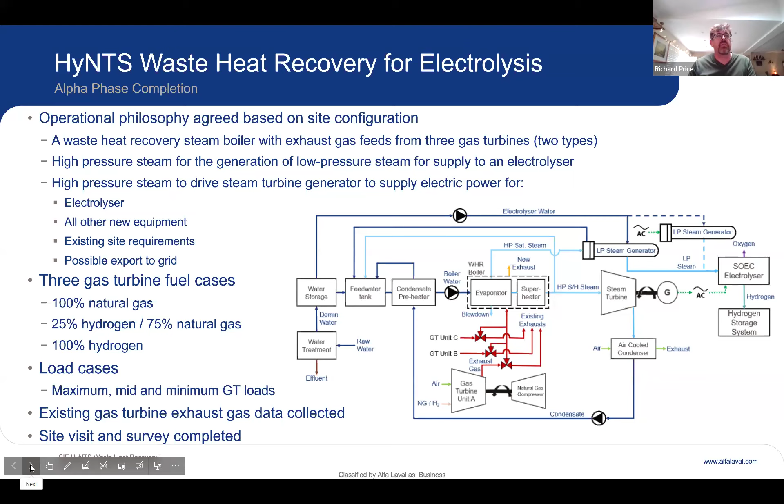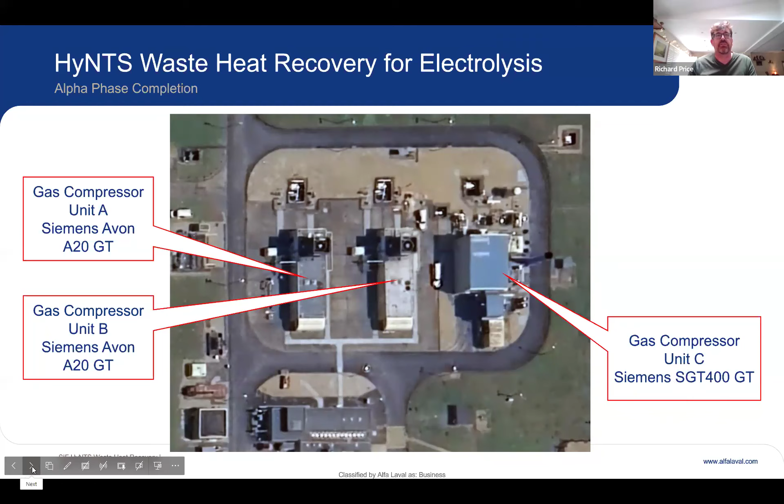And the unit on the right is the newer unit, Unit C, which is a Siemens SGT 400, installed, I think, around 2003, something like that. So you can see the layout there of the 3 gas turbine-driven compressors. Next slide, please.

So the waste heat recovery boiler was designed based on the exhaust gas rate. We had up to 248 tons an hour of exhaust gas from the gas turbines. And this exhaust gas for the Avons is over 400 degrees, and for the Siemens unit is over 500 degrees.

By extracting the heat from those exhaust gases, we reduce the exhaust gas temperatures to around 134, 164 degrees centigrade, which will change the emissions from this. This exhaust gas energy results in up to 20.6 megawatts of thermal energy recovered from these gases, and from that we can generate 25 tons an hour of high pressure steam, superheated to just under 350 centigrade.

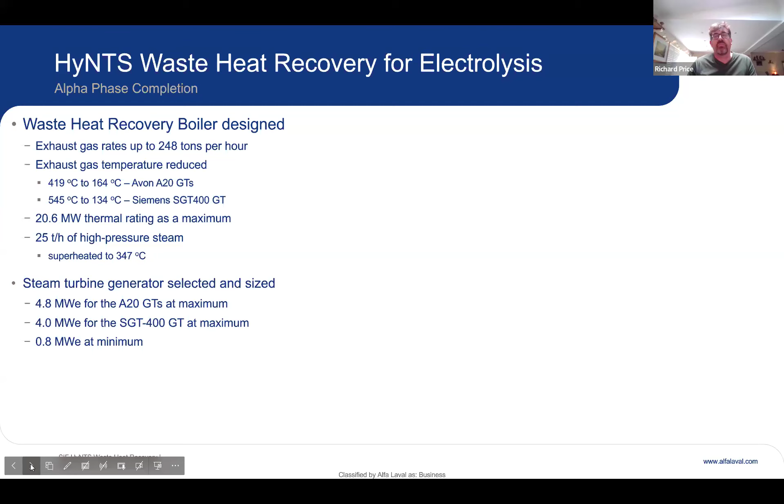So with this steam supply, we can then size a steam turbo generator. That steam turbine generator will generate electricity, and at maximum, it's 4.8 megawatts. For the Siemens unit, the newer gas turbine, it drops a little bit to 4 megawatts. And at minimum load, it's around 0.8 megawatts. So this is electrical power that we would generate.

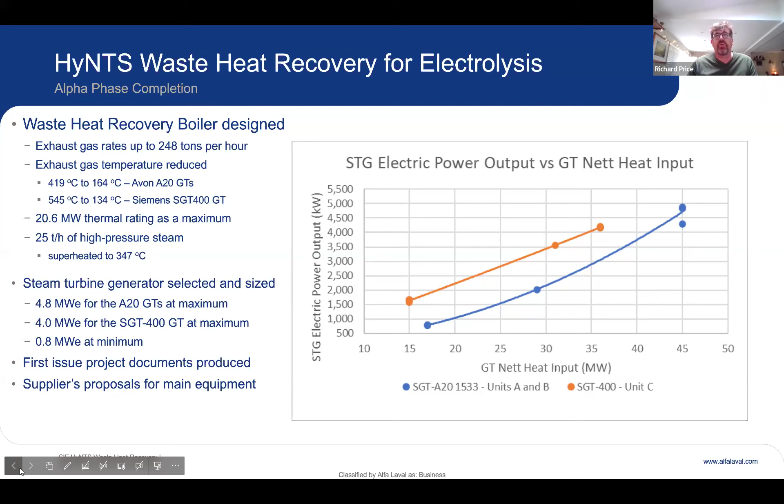So first project documents were produced, and we got a lot of proposals in for the main equipment so that we could design a system. And a new layout was drawn, which I'll take you to now.

So we have quite a lot of ductwork to take the exhaust gas from the existing exhaust stacks to the waste heat recovery boiler. The waste heat recovery boiler needs a feed water tank.

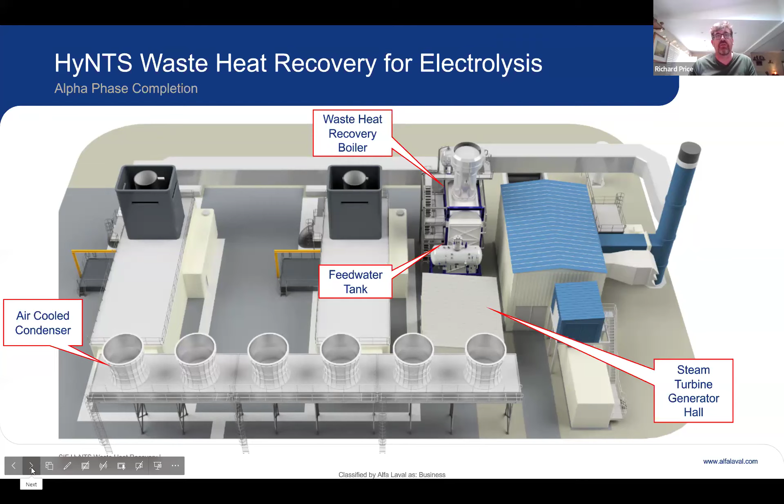And that boiler will then feed a steam turbo generator, which will go in a new building between units B and C there. And then the final steam under vacuum conditions is condensed back to water for feeding back to the waste heat recovery boiler through an air-cooled condenser, which are the 6 updraft cooling fans there.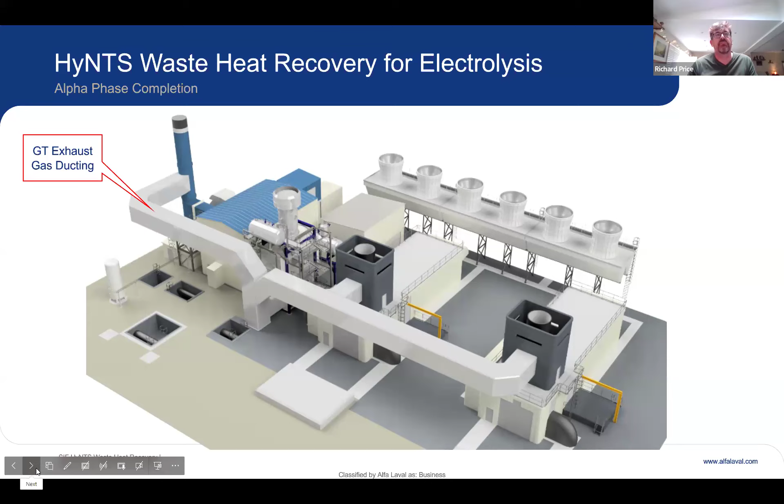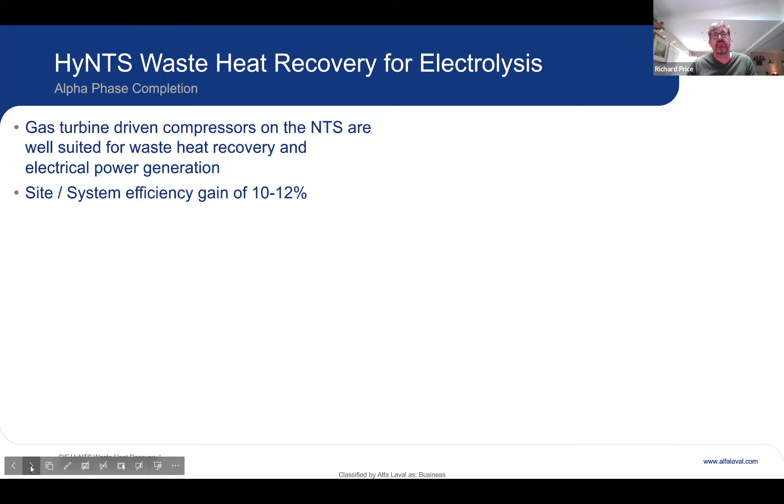So the gas turbine driven compressors, in summary, are well suited for waste heat recovery and electrical power generation. This will increase the site efficiency by up to 12% compared to the mechanical power that's currently generated for compressing. By generating this electricity as well, we will increase the whole site efficiency.

This is up to 4.8 megawatts of free electrical power, free power from wasted heat that is currently exhausted from the gas turbines. This is sufficient for all the existing site load, for the supply of future electrolyzers for hydrogen of up to 3 tons per day, and any surplus can be exported to the grid.

And in consideration of National Gas Transmission's other compressor stations, which are all relatively similar with similar gas turbine machines, this waste heat recovery can be quite a straightforward application to apply to other compressor stations that the UK has. Okay, I think that's it from me.

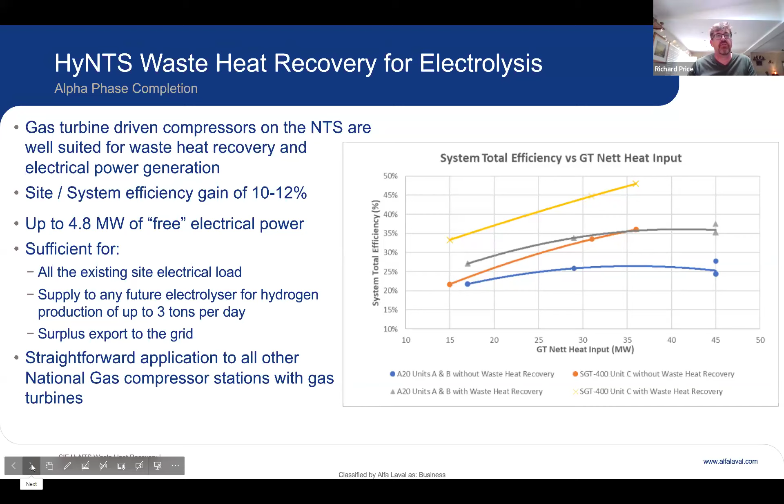Thank you. Thanks, Richard. Should be over to Sally from Cardiff now. Thanks. Thanks, Matthew. Hello, everyone.

My name's Sally Hewlett, and I've been doing the modelling work on behalf of Cardiff University. So on the screen, we have a schematic, an overview, if you like, of the proposed cycle.

As you can see, the gas turbine is in blue, and from that comes the waste heat, which is currently lost to the environment. So the proposal is to send that to the steam cycle, as Richard was describing, and then the electrical power is generated, which is sent to an electrolyser.

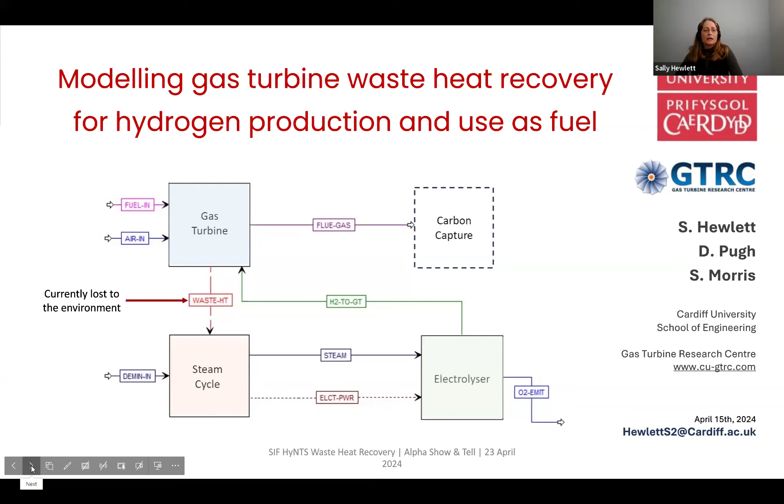Now, 2 different types of electrolyser were modelled, solid oxide electrolyser and proton exchange membrane electrolyser. The solid oxide electrolyser can make use of steam to improve electrolyser efficiency. The oxygen is emitted to the environment, and the hydrogen is fed back to the gas turbine as fuel to replace some of the natural gas need, and in doing so reduces carbon emissions.

So if we could peer inside of the schematic boxes, this is pretty much what we would see, the software simulation model. Just wanted to give you a brief oversight of this, not to dwell on it.

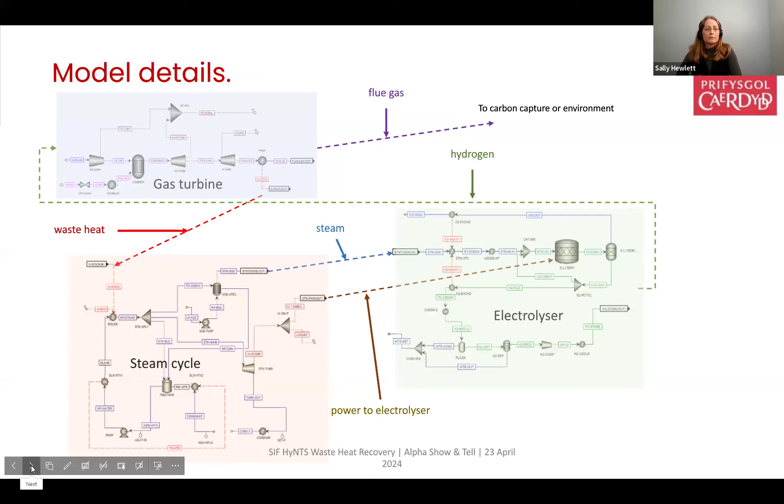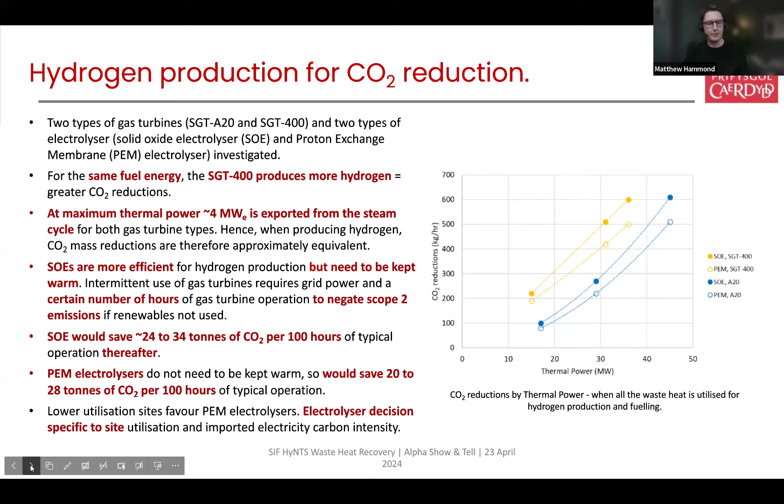So I've more or less just summarised what Richard and Sally have said, but some of the key benefits that we could potentially see here are obviously system efficiency improvements. As soon as you recover that energy that was otherwise lost and do something useful with it, you get a system efficiency gain from your operations, which is very positive.

Up to 4.8 megawatts of electricity can be generated, and we've been focused on hydrogen production from that electricity. Obviously, if you consider some of the issues that the Connectrolyser project was touching on in terms of these large electricity connections, which we're going to start to see more and more of, a project like this, where you're getting free electricity more or less, compared to paying as you would normally, is very beneficial in terms of hydrogen production.

Through Sally's modelling, we've seen that we could potentially blend up to 20% by volume of hydrogen at maximum hydrogen production capacity based on the steam available, and that would lead to a reduction of emissions from the system itself, about 8.2% CO2 savings. Again, this relates to the maximum we could see if blending directly. It doesn't consider storage, so if we were to actually store the hydrogen we produce, we could potentially see larger blends and more emissions reductions as well.

So yeah, just to touch upon the beta phase plans, so a physical demonstration.

So we'll go through all of our usual processes in terms of finalizing that detailed design, going through all the planning and consents, environmental permitting, our FPSA safety assessment processes, procurement, and manufacture of the equipment we're going to use, getting it on site, putting it all together, commissioning, and then actually testing the system would be our aims for the beta phase.

Alongside that, we would do more of the system modeling. Like I said, it was very useful, but we can now tailor the model to specific sites, and look at the capabilities and potentials for those specific sites.

Working out the regulatory barriers that might be associated with power export as a gas transporter licensee—there's probably some barriers that we would need to consider there.

Further refining the business case, relating this to what's going on in our other compressor strategy work—so hydrogen is becoming more and more into the conversation. It's working out what sites would be the best to put this at.

Integrating with the hydrogen production and storage, as we've mentioned plenty of times, including relating to our hybrid storage project, which Ellie presented on earlier, that we've been collaborating on all the way through discovery and alpha so far between these projects.

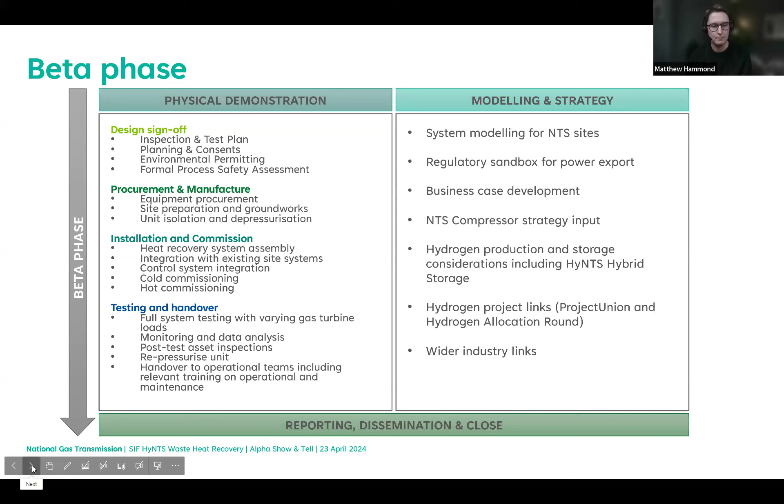Yeah, I saw this one come in. I was desperately looking for something that I could easily say, yes, here's the number, and I failed. But essentially, considering it from a pressure point of view, you can imagine gas flowing through a network and it just goes from one place to the other. However, the line pack is where we actually boost the pressures using compression, the compressor system that we talked about. So some of our pipelines go up to 94 bar—that is our way of almost storing natural gas in the network itself. That provides a significant amount of flexibility to GB's energy system.

So if we have a certain amount of gas stored in the pipe, we can build that up in anticipation of large demand periods. So when electricity demand might peak, we have a certain amount of gas stored in our system to get ready for that.

There's plenty of data on our website as well, which shows what the line pack is within our network, live as well. So I can link that in the chat perhaps.